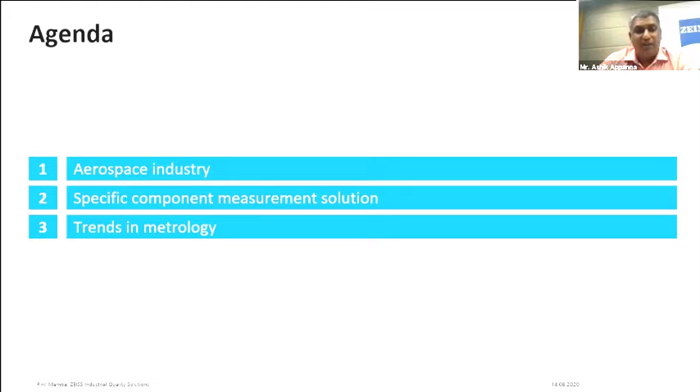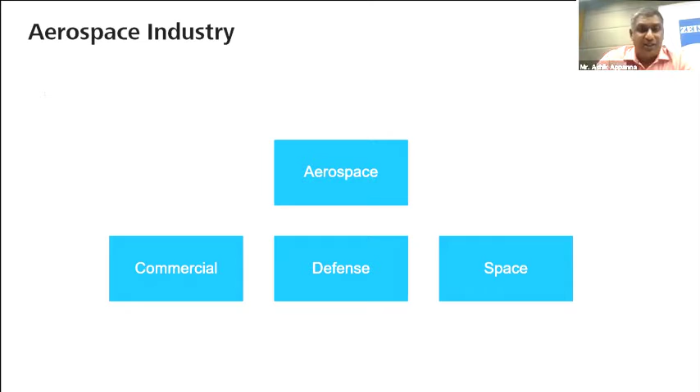Aerostructures, propulsion systems, services - all these parts are common. These are manufactured either in-house or outsourced by OEMs to different countries to find good vendors. These are very critical and require 100% inspection. In aerospace, anything manufactured should be measured 100% and should be traceable at the customer's end for any future problems to be found out.

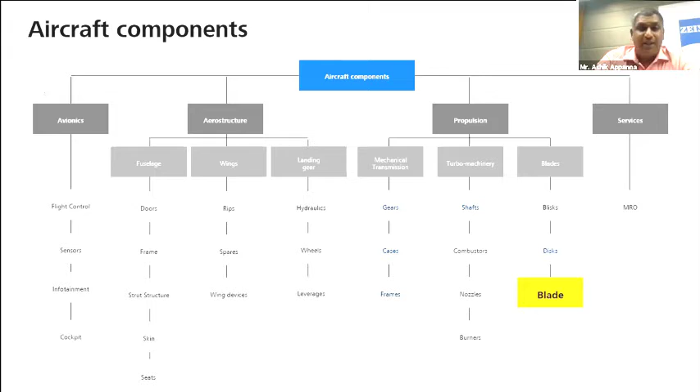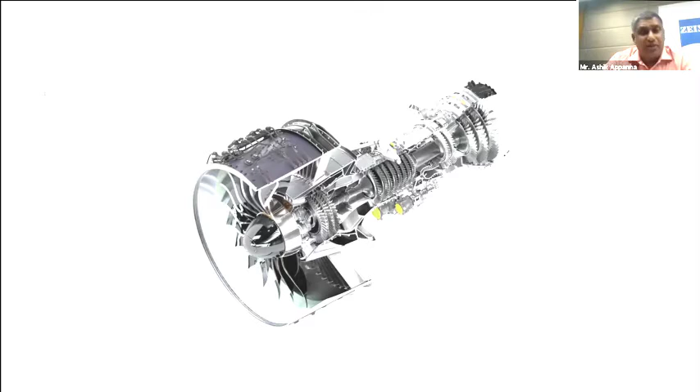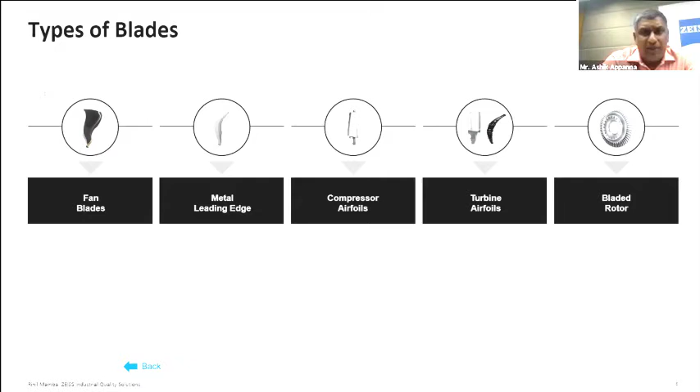To get maximum energy output, your measurements should be in line with your design criteria. You have different types of blades in a jet engine: metal leading edge, compressor airfoils, turbine airfoils, and bladed rotors - different types suited for different functions.

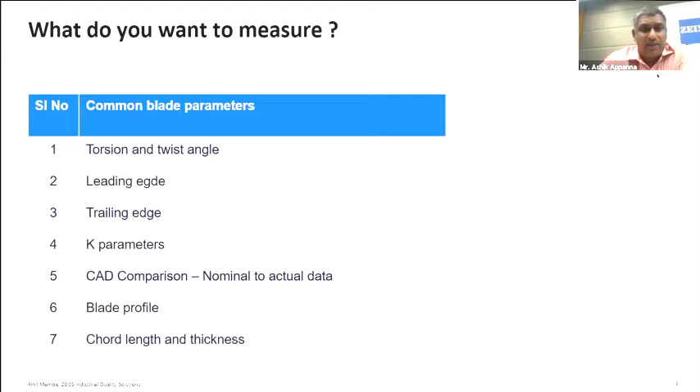When you manufacture a blade through a supplier, there are certain parameters - the lead, twist angle, leading edge, trailing edge. All these are very important parameters in the functioning of a blade. Now we have to see how to measure it. This is where we, as Zeiss, come in with expertise.

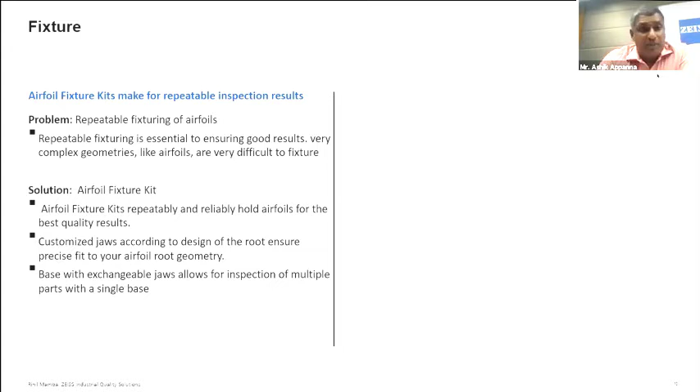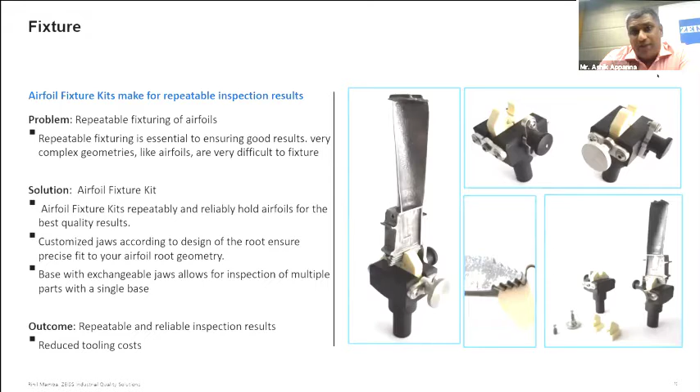Before measurements, you need fixturing - the fixturing kit is one of the most important things. You have different sizes depending on the size of the blade. These fixtures can be mounted on a rotary table, with contact-based CMMs and different types of sensors, or probes, based on quality requirements - whether accurate, medium accuracy, or high accuracy.

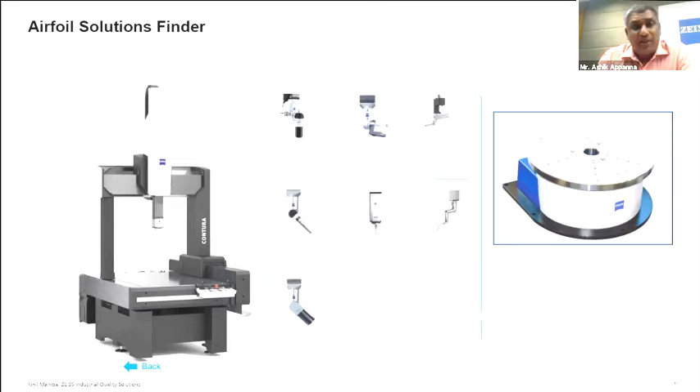For example, you have non-contact sensors using light, laser sensors, and also contact sensors using probes. Normally, a final setup on a coordinate measuring machine for these measurements looks something like this.

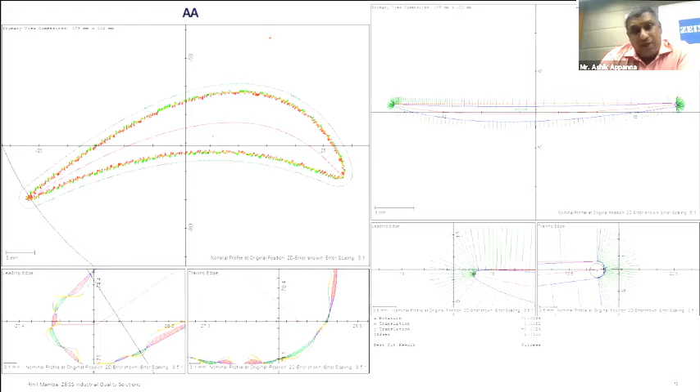You have a separate software, especially for blades and impellers. These are designed with special algorithms suiting each customer's requirements. Suppose if a vendor is supplying to Boeing, Airbus, or even Safran, they have specific requirements. So we fulfill those requirements for the customer using the software.

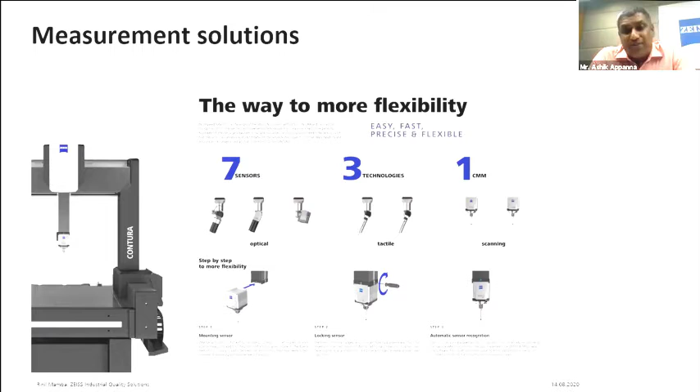And you see one of the methods, you have a typical coordinate measuring solution where one system can hold different types of sensors. That all depends on what the customer is manufacturing at his end, whether he's looking at a mid-size blade with mid-level accuracy or higher accuracy. Depending on that, we provide solutions.

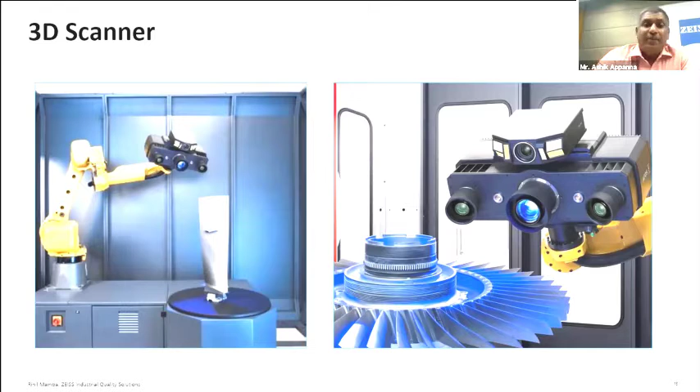And there's another type of solution for quick measurements where accuracy is not so important, but you just want to understand the profile of the blade. So we have non-contact 3D scanners available, which can also be automated, where you don't need an operator's intelligence to get in between to improve your productivity. We have this option. So this is a brief about blades.

Now, one thing which I'm really excited about always is the new trends in metrology.

We use X-rays. X-ray is one of the latest trends in measurements and processes. Why X-ray? It's the same concept as when you go to the hospital with a broken bone. To find out how much is broken, where it's broken, you use X-rays. The same concept of machine is brought into manufacturing today to check two things.

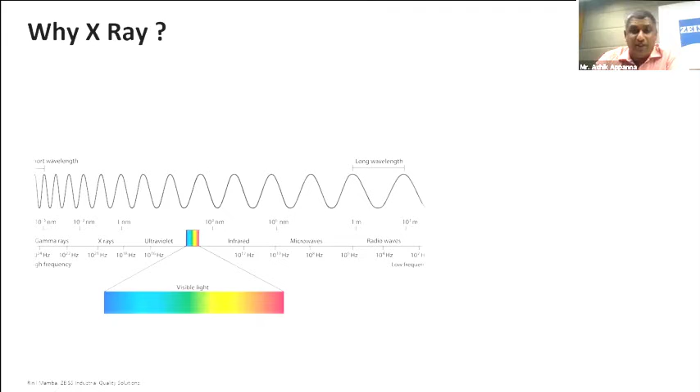One is to check for internal defects, and second is you can also do the metrology part of it. So why X-rays? X-rays are the highest energy electromagnetic waves, and they're able to penetrate matter easily. They have the shortest wavelength and higher frequencies, and because of this, you have the penetrable properties.

So depending on the material, if you have electronics, it can be easily penetrated. If it's aluminum, it can be easily penetrated. If you have cast iron or really high grade metals, then you need a longer exposure for the wavelength, depending on how much power you intend to provide. So if you want to look at these options, they are there.

There are several options depending on the customer requirement. Suppose the customer only wants to look at a crack, you have 2D radioscopy machines. If he wants to do a complete analysis to find out how the pores are, where the pores are located in the casting and after machining, then you can use computed tomography.

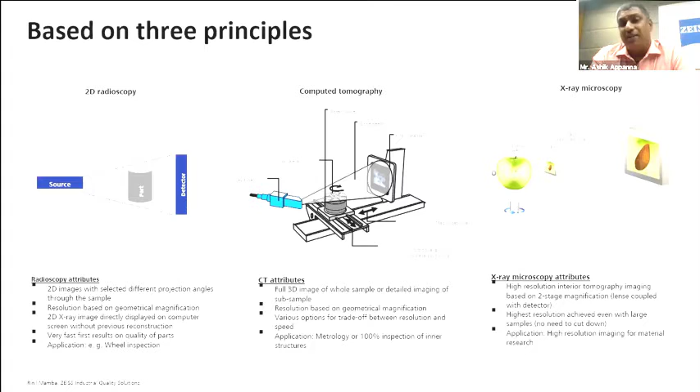And you also have micro X-rays. These are basically very high end, used in research of materials and parts. So normally in the industry, you have 2D radioscopy and computed tomography, which is quite popular.

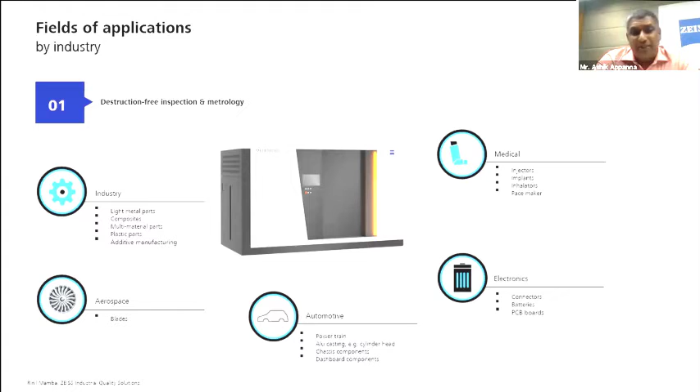And the field of application can be on anything. You have connectors, batteries, PCBs, powertrain, casting components, casting machines, aerospace blades, connector housings, light metal parts, even composites. We have provided these kinds of solutions for customers.

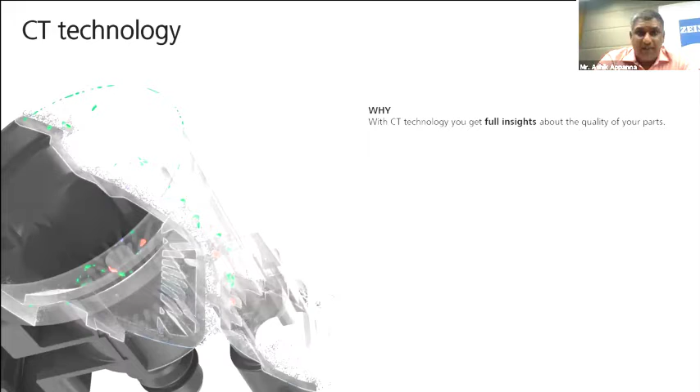And why CT? CT gives you full insight about the part, how the part is assembled also, what is the wall thickness and porosity or blowholes. All these can be done.

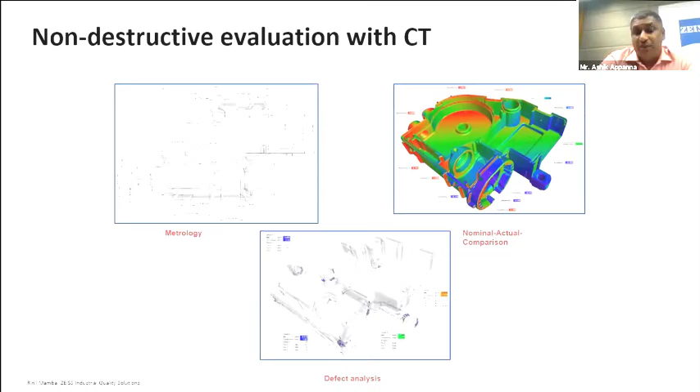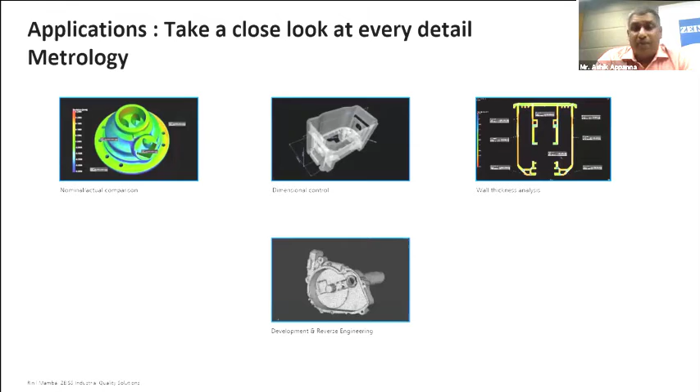And using the software, once the part has been CT scanned, you can also conduct metrology analysis, direct CAD comparisons, nominal comparisons, and defect analysis within the part, whether external or internal. Basically you can use it for process control, excellent process control. And when you have assembly of parts, you can also use it for wall thickness analysis, which is really good.

And what it overall does is, some of the examples I'm trying to give you: defect analysis when you want to check on assembly control. When you're talking about critical weld joints, you want to check how well the joining has happened in welding. So these are certain fantastic things you can really get done using CT technology.

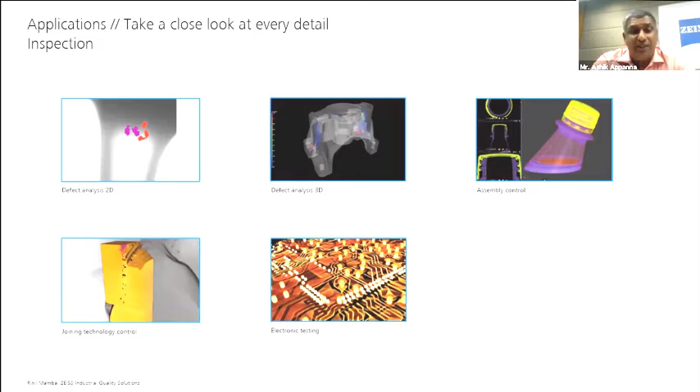And even electronics, PCB board testing - if you want to check for critical assemblies within the part, you can just put the part inside the machine, get the X-rays scanned, and then do the analysis using the software.

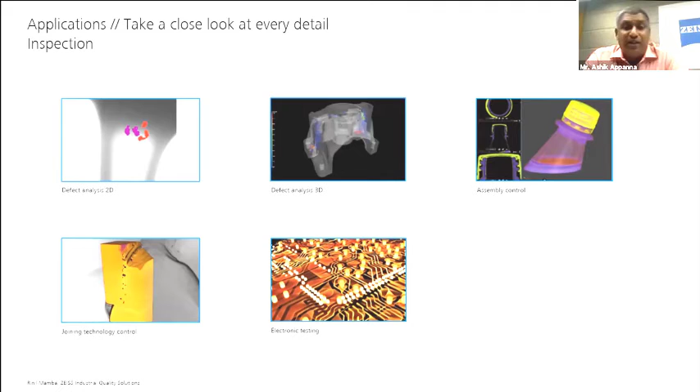Sometimes you can also detect defects. With defect analysis in 3D, you can actually locate exactly where the defect is, at what plane, what angle, at what coordinates. That's the beauty of these CT machines - overall, it helps you control your quality better.

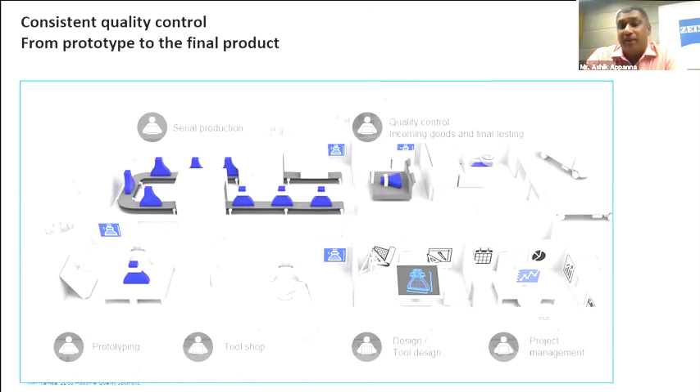Suppose you would like to improve the productivity of your process - if you're developing a new product and want to decrease the product life cycle, manufacturing cycle, or prototype testing, this is one of the best solutions, based on my experience.

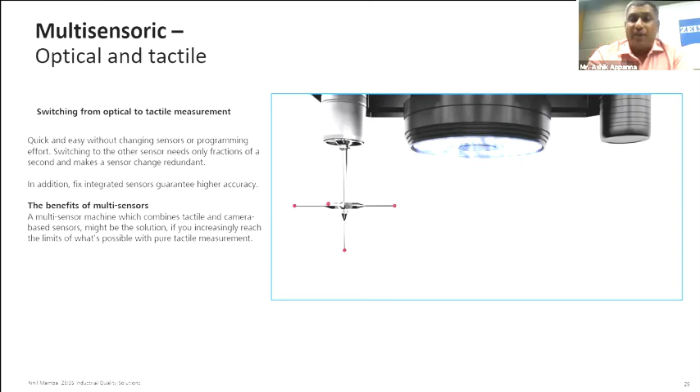After CT, there's something called optical sensors, used for parts which are very feeble, like thin plastics, where you want quick measurements of dimensions. So you have a combination of non-contact and contact systems - wherever you need non-contact, you use light, and wherever you need contact, you use a standard probe method. You can also set it up for 100% inspection or inline inspection - we have the solution for you.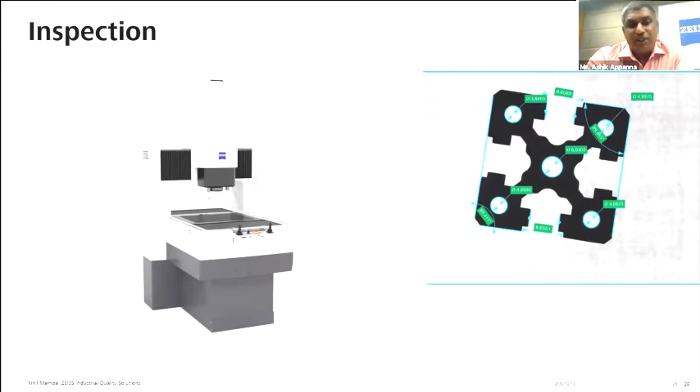Just to give you an output, to show you how these machines look, I'm showing you this. This machine's brand is called optical inspection.

Then if you want in-process metrology, we have CMMs and 3D scanning for it. And if you want to look at any internal or external defects in your process, you can directly use an X-ray CT tomography system. For final inspection, when it comes to dimensional and surface quality inspection,

we have a complete range of solutions together for additive manufacturing. We've been successful with quite a few companies, and apart from additive manufacturing, we've also given solutions to metal injection molding companies.

One more beauty of it is that all the output of these machines, for a part, can be connected digitally. So if a customer wants to know what he has done right from the starting stage to the finished stage, he can always get the results at one go. So this is what we offer, and this is what we have expertise on.

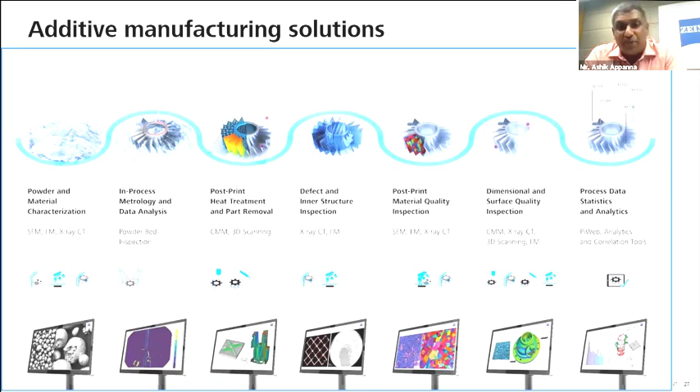Zeiss not only has expertise in measurements, but also - remember, we are the first company to invent microscopes. So we have expertise on both sides of the spectrum, and this gives us a great advantage, and also a great benefit to customers who are looking into total solutions.

The final trend always going on in this industry - right now people normally talk only about production on the shop floor. Now there is also production in the quality systems, how fast you can measure each component. Whether you want to integrate with a robot in the cell, we are able to do it with today's technology. Whether you have multiple parts to measure, you can have manual or automated loading systems, which increases the productivity of the machines, decreases the cost for the customer, and benefits both sides.

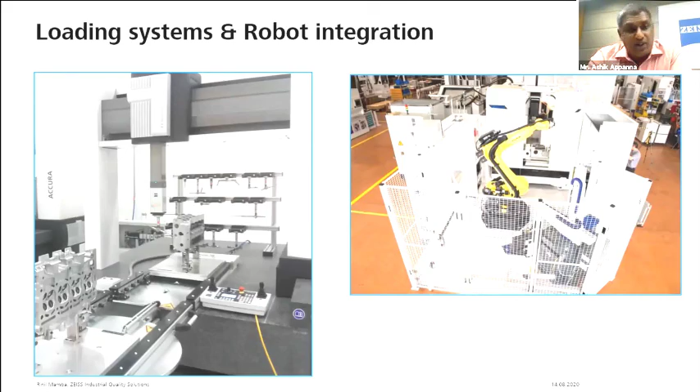So by this, I think I end my 10-minute session. I hope people have got some brief insights about what Zeiss does.